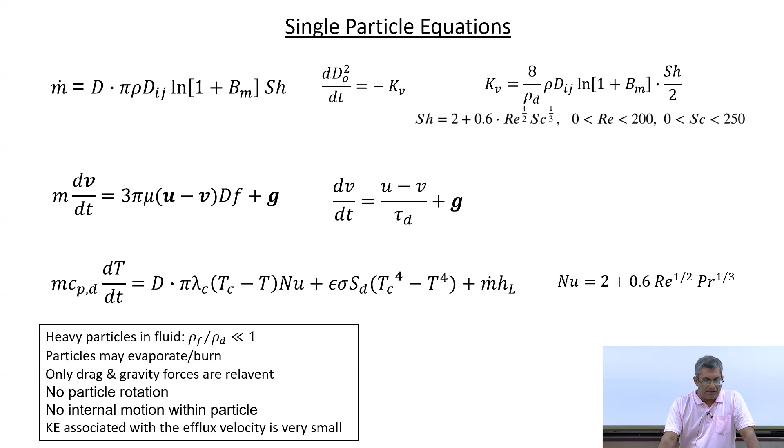However, the analysis that we are going to do is not restricted to these assumptions. So you can include those additional terms also. So this is for your understanding. We are beginning with a simplified case. Okay, so we'll start with a very simple case of particle behavior, or you can say the behavior of a solid particle without any mass transfer in a flow field which is described by a constant velocity of the carrier phase.

Then we will bring in further complexity. For example, we'll say, okay, now we will add evaporation. Then we'll consider many particles or a polydispersed system, and also the cases where the fluid velocity changes spatially and temporally. And like that, we can go on adding further complexities, and you will see that this modeling approach gives a lot of insight into the physics of the flow, even if this refers to a case where we have some simplification, and the major simplification is that the carrier phase is prescribed.

Okay, so the first problem is like this. We have a droplet or a particle injected at an initial velocity of V0 into a uniform flow of air, where the air velocity is prescribed. Find the distance and time corresponding to particle velocity equal to 99% of the air velocity. Neglect gravity and droplet evaporation. Okay, so the scenario is like this. So how do we proceed first of all?

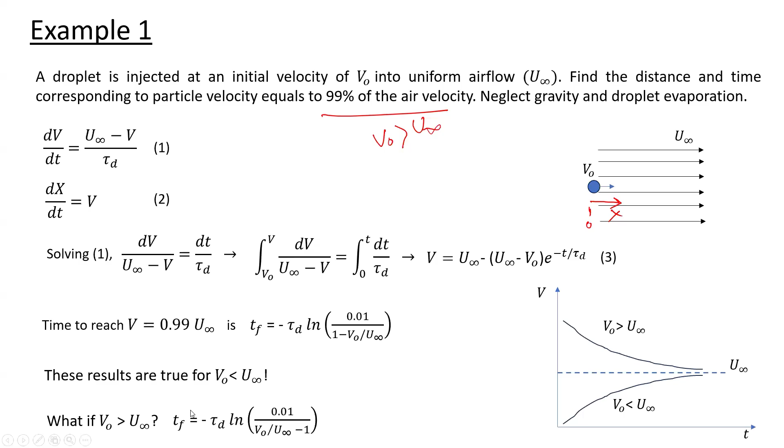So, it can be made generic by saying that you reach a velocity which is plus minus 1% of the free stream velocity. So, here it should be 1% more than the carrier phase velocity. If you do that, then you get this expression. You see the expression does not change apart from this change in the denominator.

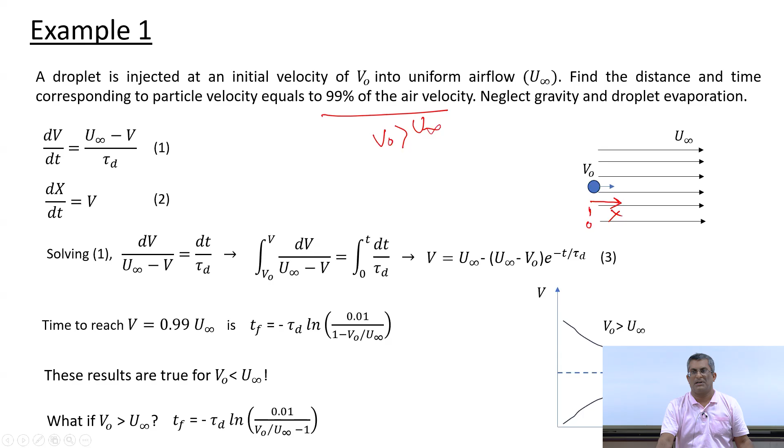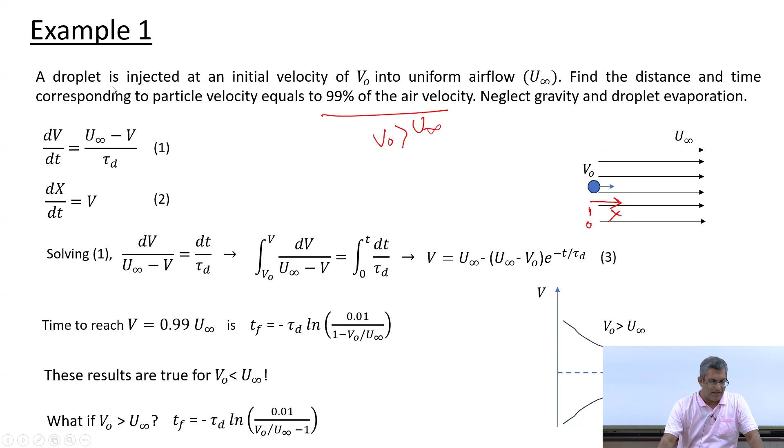Now, here we found the time required, but how about the distance covered by the particle in this time? What shall we do? If we want to find out how much distance the particle covers in this time, then we need to integrate this equation. We can put this expression for velocity here and integrate it, and you get an expression like this, where this is valid for this condition, and you have this when the particle injection velocity is more than the carrier phase velocity. So, you see that the solution tells you that you have two parts here.

If we consider some specific examples, if we put V naught is equal to 0, so imagine you have a flow and you release a particle from 0 velocity, then it is easy to see that the time required to reach 99% of the fluid velocity is basically around 5 times tau d. What is tau d? It is the relaxation time. So, it scales with the relaxation time, and the distance traveled by that time is equal to velocity of the carrier phase times the response time multiplied with 3.6. So, the distance traveled scales with this parameter.

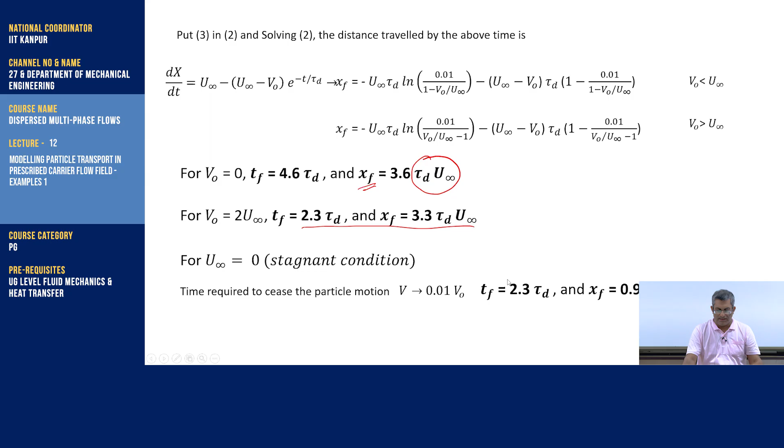Okay. So, you can solve the equations the similar way and integrate considering this. So in that case you will get this answer. Okay. So this is the most basic case, where we could predict the distance traveled by the particle before it stops.

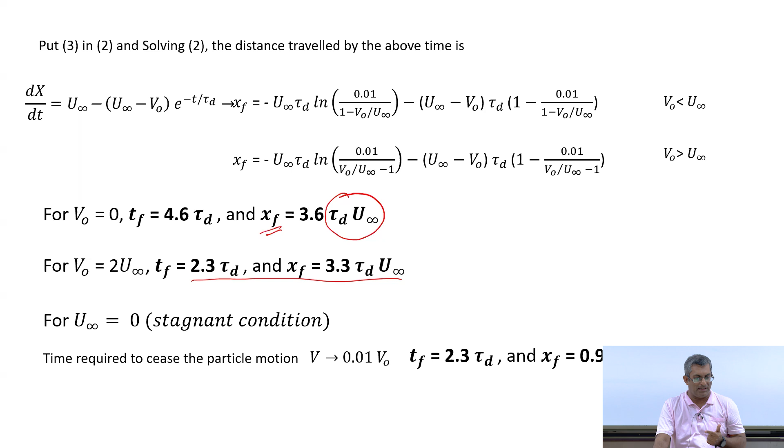Next, we can make it more complex. Now imagine the particle is evaporating. So if the particle is evaporating, then how long it will travel before it stops? So that brings us to the next problem. So here the question is, find the distance traveled by the droplet prior to complete vaporization.

So there can be two different reasons that govern the distance traveled by the particle before it stops. First one is drag itself. So if the drag is high, it is possible that the particle would come and stop and then evaporate there itself. Second case, the particle size itself reduces. So the particle stops because it has evaporated. Okay. So in that case, how do we find this distance? So this is the next level of complexity.

So in this case, what do we need to do? We have to consider the momentum equation as well as the mass conservation equation. So you see, we are using the d square law here directly, because here the interest is on size change rather than the mass transfer rate. Okay. So you write these two, and here again the variable is d. Because now the particle size is changing along with the distance, we can express the result either in terms of particle size or in terms of x.

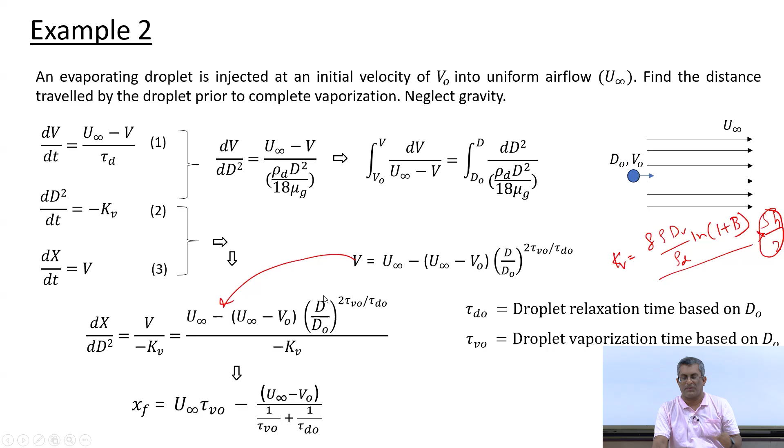So we get this expression. Now imagine if the droplet evaporates slowly, then what will happen? The time scale for vaporization is much more than the time scale for the particle relaxation, or the time scale of mass transfer is longer than the time scale for momentum exchange. So this means that the particle would quickly adjust with the flow velocity.

Okay. So then we can drop out this term here, and this can go up, and considering that anyway this is larger than this, we get the distance travelled by the particle is equal to u infinity tau v naught plus v naught tau d naught.

So considering that this time scale for vaporization is longer, and if we assume that u infinity and v naught are comparable, then we can say that this is controlled mainly by vaporization. So the vaporization process will control how long the particle would travel, because it has reached equilibrium with the surrounding, that is, it has reached the momentum balance with the surrounding quickly. So now it is controlled by evaporation.

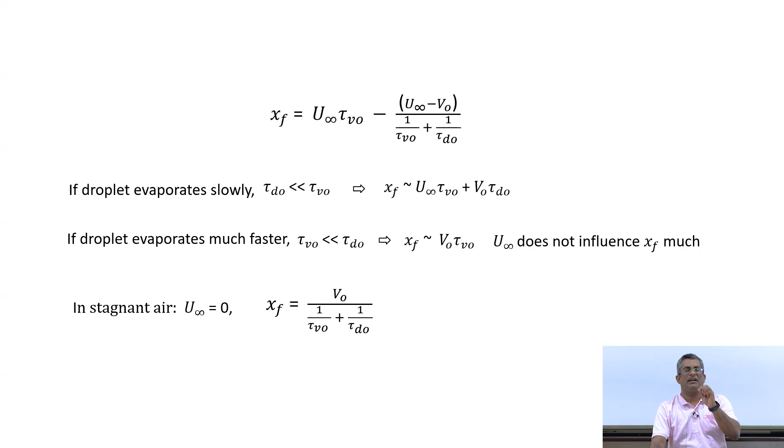On the other hand, if the droplet evaporates much faster, then we get this, that is the distance traveled is basically equal to v naught times tau v naught. So here the vaporization is completely governing the distance traveled by the particle, because it is vaporizing so fast. Let's say you inject a droplet into a combustion chamber which is maintained under supercritical condition. So it will evaporate very fast. So in this case, the carrier phase flow does not influence the distance traveled much.

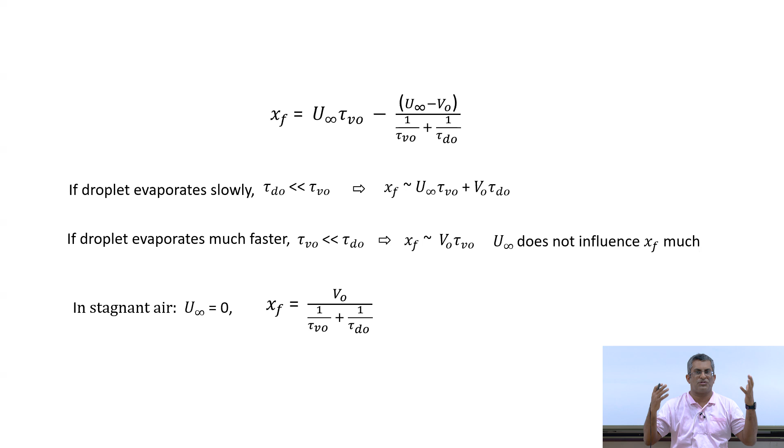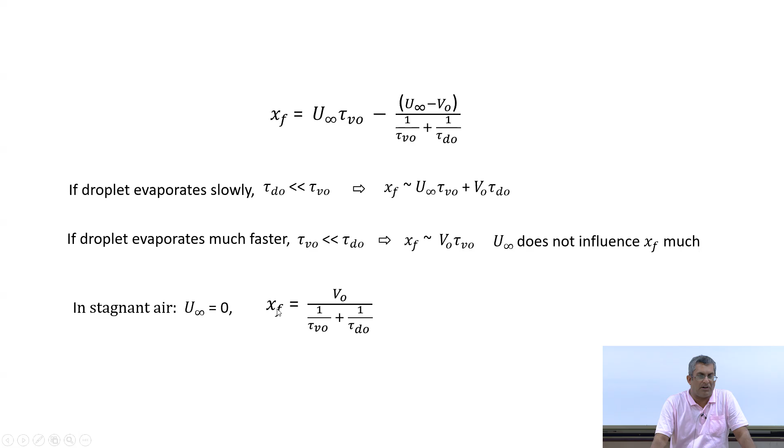Now this is also one interesting case, droplet evaporation under stagnant air condition. This is relevant to transport of the respiratory droplets, for example. Mostly we don't have a strong co-flow, though it may be present. So in this case, if we simply put u infinity equal to 0, we get this expression. So the distance traveled is obviously proportional to the injection velocity, but apart from that, these time scales also influence the distance traveled. Not only that, it will affect its trajectory also, that we will see.

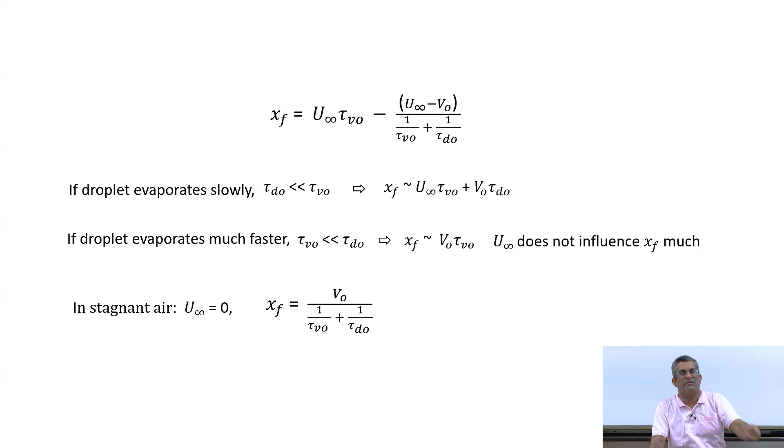Now, how do we model transport of polydispersed particles? In this example, we are considering droplets, though it is not restricted to droplets. Here again the assumption is that the continuous phase is specified, and we know the injection mass flow rate of the liquid phase. And also we will assume that the characteristic droplet size is known. That is, the droplet size distribution is specified.

If you remember, we had discussed this. So how do we specify droplet size distribution? We have to rely on some model which agrees well with the experiments. Let's say you have taken measurements of respiratory droplets, and that shows that it fits well to a Rosin-Rammler distribution or log normal distribution. So how do you prescribe that? Scale parameter, spread parameter. Scale parameter means some characteristic particle size you need to know, for example SMD, VMD, AMD, and then the spread parameter. If you specify these two, then you are specifying the size distribution. So here we assume that the size distribution is specified.

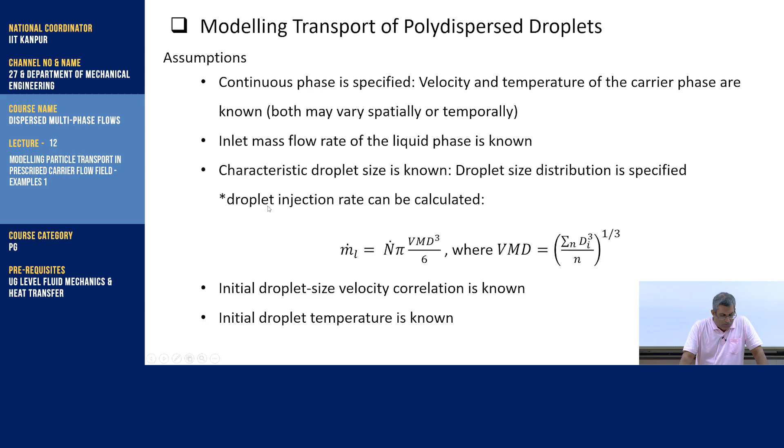Now, how do we calculate the droplet injection rate? What is droplet injection rate? That is how many droplets we are injecting per unit time. Because now we don't have a single particle system, we have a multi-particle system, and the system is polydispersed also. In the case of a spray, for example, you have a large number of small particles and a low number of large particles. So we can estimate the injection rate by the following. This is the rate of injection of the liquid. Now this is equal to the number of droplets we are injecting per unit time, let's say per second.

Then this is the, okay, here the term rho d should also come, and this is the mass of individual droplets. But if you remember the expression for VMD, so what is VMD? Volume mean diameter. Now what is volume mean diameter? This is a representative droplet size such that the mass or volume corresponding to that size times the total number of droplets is equal to the total mass of all droplets or total volume of all droplets, and that is what we are using here.

So because you know the size distribution, you can calculate what is VMD here. Either you can calculate VMD if you have the experimental data, or else if the particle size distribution is prescribed, that is the continuous distribution is prescribed, still you can calculate the VMD. And once you know VMD, you can use that here. So this bracketed term refers to volume of each particle. So now this is mass of each particle times the number of each particle. So from here, because this is known, you can calculate what is the rate of injection of particle.

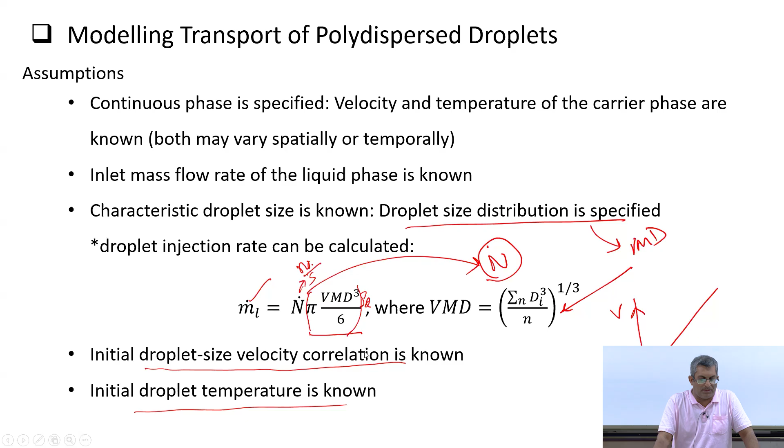So now we will look at an interesting example. That is, how do we predict the length of a liquid rocket propellant combustion chamber? How we can use whatever we have learned so far to make this prediction. So here also we are making some assumptions, and one of the assumptions is that in this combustion chamber, temperature and pressure are constant,

because specifically in case of liquid propellant combustion chamber, I'm not talking about the initial stage, but when it is running under steady state, the temperature and pressure are typically under supercritical condition, and they are very high, and pressure does not vary much along the length of the combustion chamber. There will be some drop due to viscous drag, obviously, but we can neglect that conveniently. And then also we can assume that the temperature does not vary much because it is already at high temperature.

So what is the question? The question is, here the liquid injection rate is known. Also, we know the gas injection rate. So here you imagine you are injecting some liquid droplets as well as gas. Here we assume that that is air. Then as I said, the temperature and pressure do not vary and are constant throughout. And also here we are assuming that the droplets burn right from the beginning. This means that there is no droplet heat up period, and there is a flame around the droplet right from the beginning, which is also justified because again the temperature is so high.